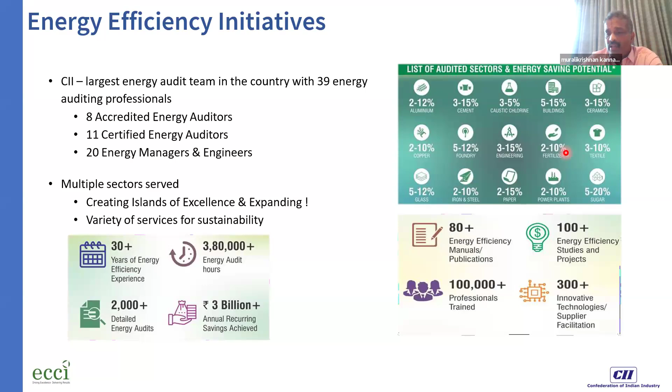Irrespective of whichever sector you are operating in, a building, a major industry, a cement industry, or a steel industry, people are continuously improving, because one of the fundamental reasons is that cost is increasing. We have not only worked in India, but across the globe in various countries, including Japan, Korea, and the Philippines. In the Philippines, we had the opportunity to visit and conduct audits in two of your sugar plants and two of your power plants. We have done work in Malaysia, Indonesia, Thailand, and African countries as well, and we are also trying to do an audit in the US.

Efficiency is important. The only two buzzwords happening across the manufacturing sector, the think tanks and the stakeholders: one is climate change, the other is startups, incubators, or innovations. Innovations and startups are the most popular words in the globe today. And second is climate change, which we all know the reasons for. We need to sustain the world. We need to give our grandchildren a better world. For that, we have to take action.

Internationally, all the stakeholders and think tanks agree that energy efficiency is the most competitive solution and still has close to 40% of the opportunity for reducing emissions in the most economical way. So that's why we need to focus on energy conservation and energy efficiency. It also supports energy security and business sustainability, and it can be the best tool to achieve ESG, where we have environment, society, and the governance is replaced by economics here. In all three circles, this is the central area where energy efficiency can definitely lead to sustainability.

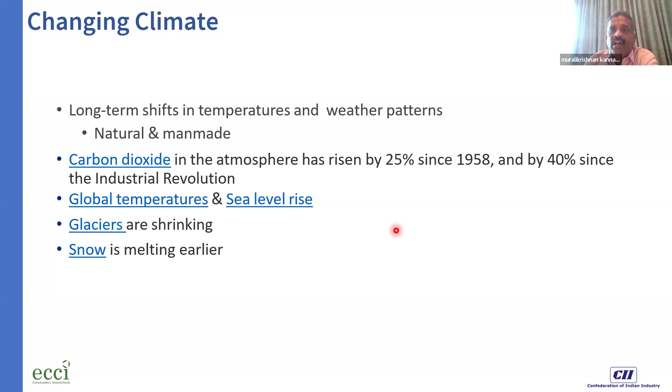Also would have announced it. India has announced the targets of becoming net zero by 2070, which is still far away, but still we need to do a lot of work on that. And then, as I said, the 1.5 degrees is going to come in 2027. We need much stronger, much deeper, and much bolder efforts to do that.

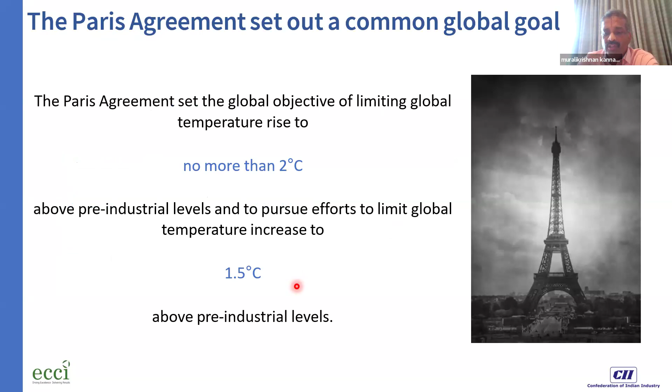Energy efficiency is one of the easiest, one of the most economical, and one of the most promising levers. So that's why we all need to take this on. And it's not only sustainability which is most important, but also to sustain the business, to become more competitive, to keep the margin, and to reduce the operating cost. We need to focus on energy efficiency.

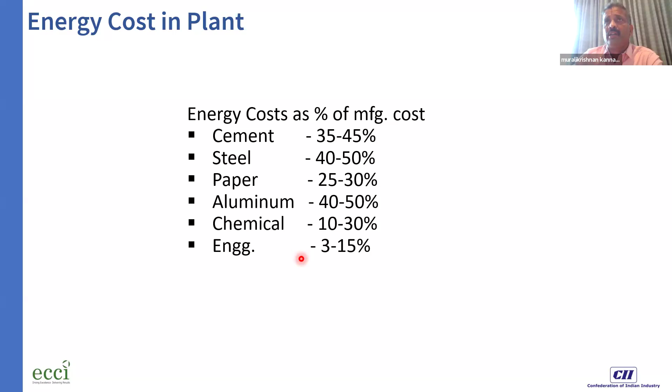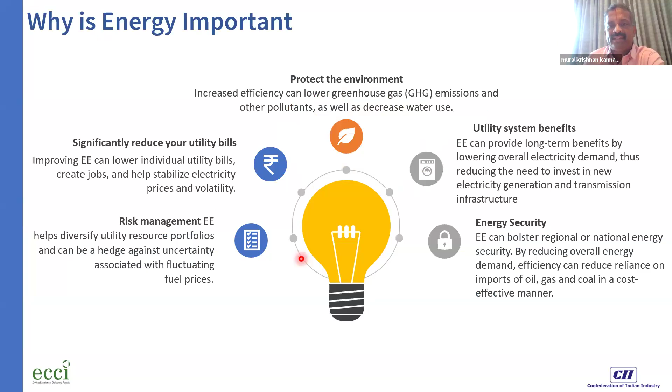And further, there will be carbon taxes, there will be other requirements, which will all increase our cost of manufacturing. So energy efficiency, by definition, is the process of getting more output with the same input, or reduced input for the same output. So that is what is needed. We have been discussing this, so I don't want to repeat it. So we need to focus on energy efficiency.

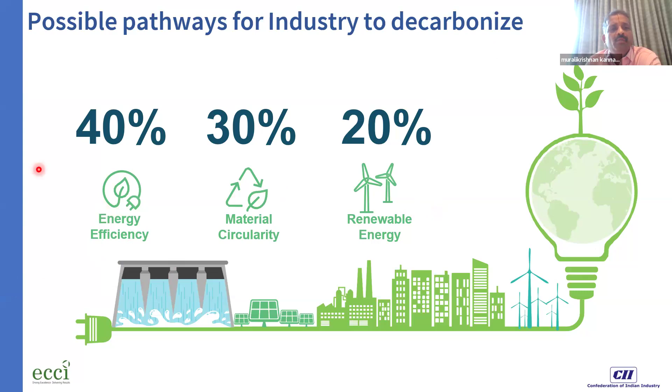And as I said, for decarbonizing, which is the most important goal of our generation, 40% can come from energy efficiency in the most economical way. 30% can come from material circularity, and 20% can come from renewable energy, because renewable energy is not very attractive, whereas energy efficiency is the most attractive tool to decarbonize our emissions.

And energy efficiency can be done by three methods. One is capacity utilization. Maybe some processes need 100% capacity utilization always. For some processes we can optimize what the optimum capacity is. And then, of course, fine-tuning. What we strongly believe, what we have understood and what we have experienced is that every equipment, every process has a margin. The margins are built by the plant people, by the designers, by the technology providers, and by the consultants. So why are margins kept?

Margins are kept to meet the immediate future requirement and varying climate changes. For example, all of us are experiencing extreme heat, extreme floods and extreme winters. So the same equipment, for example, an HVAC system in a building, has to adapt to all these conditions. Even in Europe or in colder regions, temperatures are now going up to 40 degrees. So the same equipment has to deliver at 40 degrees. It also has to deliver at 2 degrees or -5 degrees. So the equipment has to have a margin.

So the operating team, the working engineers in a manufacturing plant, their intention should be to fine-tune the equipment according to the current level of production, current level of demand, and current level of operational requirement. That's why fine-tuning is most important, and an energy audit will mainly focus on fine-tuning. Of course, on capacity utilization and then fine-tuning.

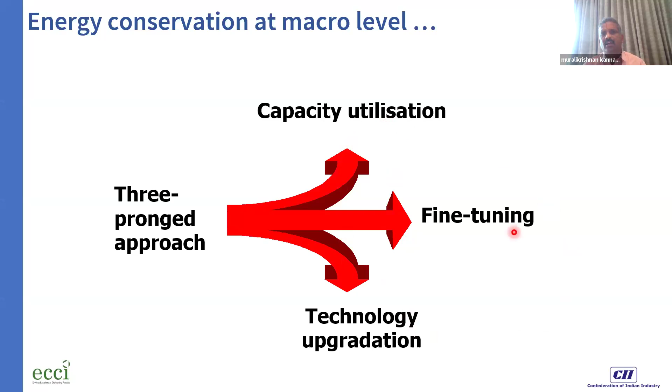In a study, when we focus on energy conservation or energy consumption, the audit team will definitely focus on all three, not only on fine-tuning, not only on capacity utilization, but also on technology upgradation. We have seen that all the excellent companies who are global best or international leaders in energy efficiency have three separate teams with a common objective, and they have tapped all the potential. So let us see a few case studies related to technology, capacity utilization, and fine-tuning.

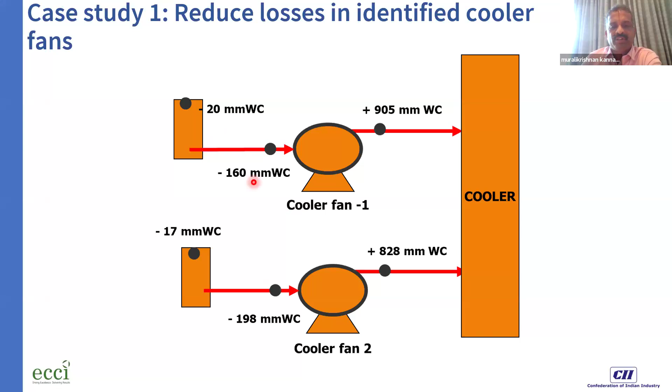The fan is consuming, say, for example, 185 kilowatt per hour. 19 kilowatt is additional or excess because of the high suction. So this is a clear case where 10% of the power is lost because of the improper designing of the suction. If the suction is properly designed, it should be minus 20. But because it is having a silencer which is not working fine, and the design of the inlet suction, the pressure is going to minus 160, which is equivalent to 10% of the power consumed by the fan.

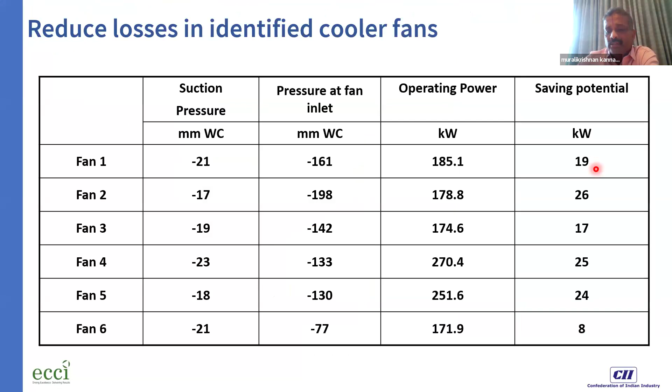So of course, you can quantify that for 8,000 hours in a year and then multiply by 10 years into your energy cost. This can be a significant amount. So what can we do? This is an opportunity where there is an improper design, and it is also a typical example of fine tuning. The radius of the inlet should be 0.25 times the effective diameter. That is the recommended value. So during the audit, we can check what is the pressure, what is the saving potential, and what is the problem in the design, so that can be eliminated.

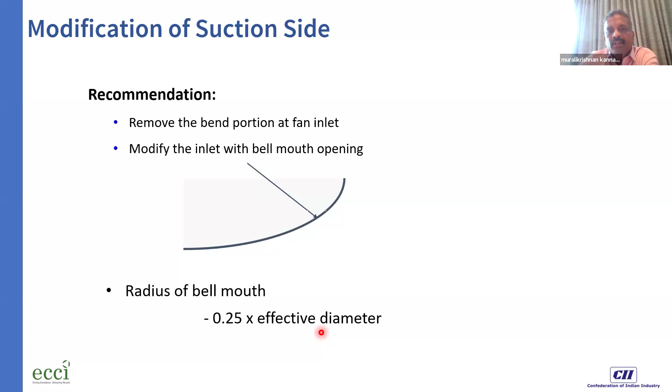Now, this is the case study of a plant where they have invested $6,000. Of course, these costs vary from country to country, because in some plants the manpower cost is very cheap, and the equipment cost is relative. Maybe in some markets the cost of equipment can be very low. But what is important here is the idea and also the implementation. This opportunity doesn't need a major modification. It is very simple technology, it can be easily identified and implemented in a very quick way. And most important, it has a very attractive payback period.

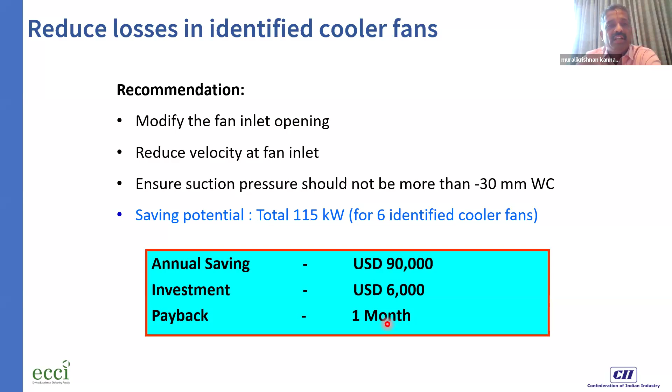The payback period is less than a month, maybe for Indian conditions. For international conditions, we have seen this in South Korea, Indonesia, Malaysia, etc., maybe the 1 month can become 5 months, but still it is very attractive. Similarly, if we talk about the latest technology, there are a lot of tools, artificial intelligence tools, IoT tools, which can help us in fine-tuning the process conditions.

For example, in any manufacturing process, whether it is cement, paper, steel, etc., there are fluctuations in the plant. These fluctuations occur in major important loops. For example, the PC outlet temperature versus coal feed rate, which is the most important process parameter. We have to maintain the calcination, which is important for the kiln to give a good quality clinker and to maintain the output. So the temperature is controlled with the coal feed rate. Of course, many things can vary. This is a practical PID loop of a plant, where you have the temperature versus coal feed rate. You can see the fluctuations.

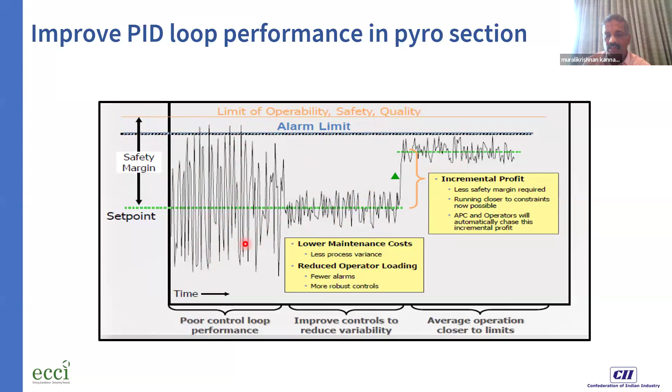If you have this kind of fluctuation in your process parameter, this is your alarm limit, or this is your set point. The operator will always try to keep a margin, and because the fluctuation is very high, he will not be able to put that in automatic mode. So he will be operating in manual mode, which will increase our specific energy consumption. There are a lot of latest tools available which can collect the data, connected to your PLC or captured from the MMI screen, and then the tools can tell you how much is the problem in the fine tuning.

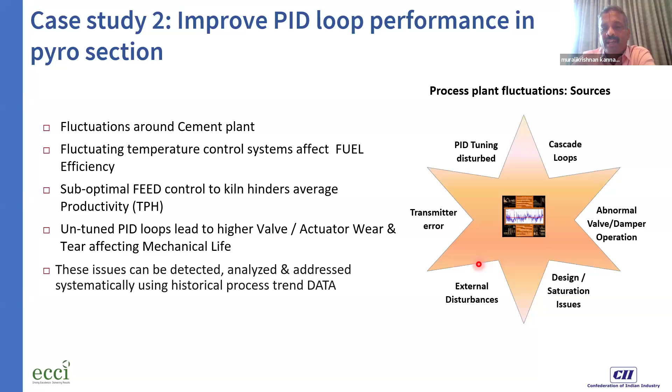This can also tell you: is the problem in the process itself? Is it the CV of the coal? Is it the temperature sensor? Is it the solid flow meter which is supplying the coal? Is it a mechanical problem? Is it a process problem? Is it a fine tuning problem? Your proportional, integral, derivative settings, set points, all these can be checked without disturbing the process, remotely, and a weekly progress report can be done. And at the end of the day, when you fine tune it, the loop can definitely become stable.

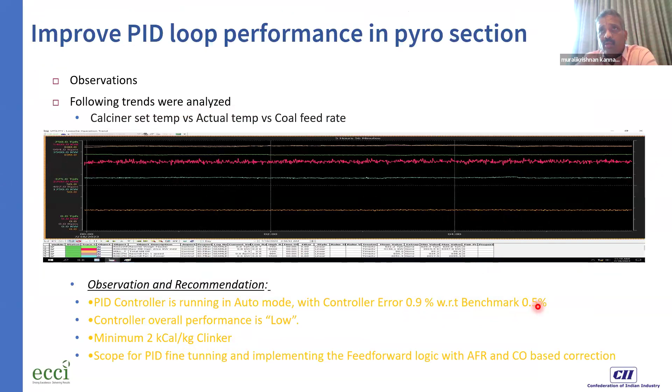This has been implemented in more than 50 cement plants in the country. They have achieved about 2 kilocalories per kg of clinker, which is significant. The PID standard deviation has come down from 0.9 to 0.5, which has resulted in better operation, better quality clinker, lowest energy consumption, and better savings. So these are some examples. In kiln firing, this was the earlier variation, and after fine tuning and taking action, the variation has come down.

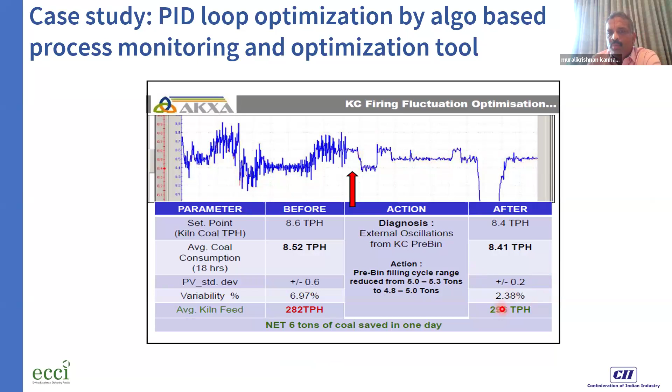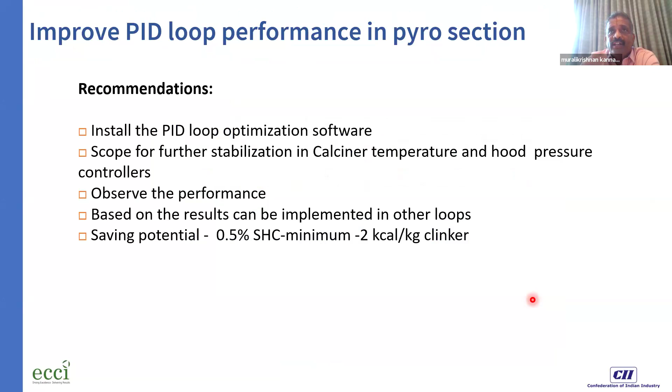So this has saved 0.5% of energy, which is significant on an annual basis. So this is what can be done with automated tools. This is another opportunity wherein we can see, just using a tool which is of the latest technology, without disturbing the process offline, we will be able to save some energy.

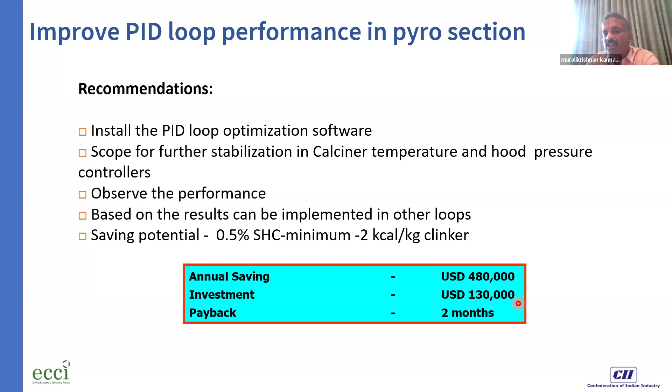So the savings is very attractive, 500,000 US dollars with just an investment of 130,000 US dollars, which again doesn't need any stoppages, doesn't need any disturbance to the process. This can help us in getting the payback period less than 2 months.

And then the other opportunity is, the entire cement industry is only gas and material. So the pressure drop plays a very important role. The fans consume about 25% of the total energy consumption. The fan energy consumption depends on the pressure. So during the study, we can see the pressure drop across the various ducts. So here in this case, the downcomer duct is having a high pressure drop.

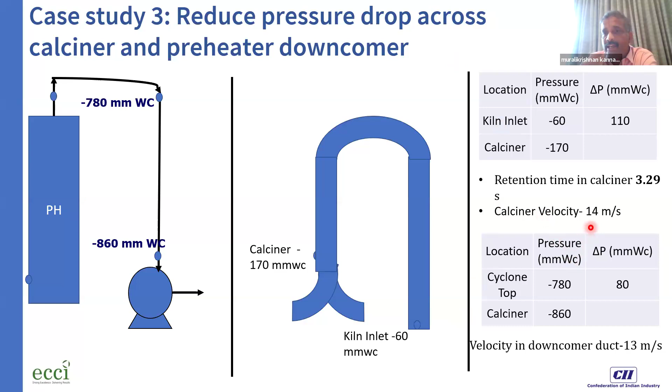We can measure the pressure drop across the cyclone, various process equipments, and then compare them. And then we can get into further details. Is it because of the velocity? Is it because of the false air? Is it because of the material accumulation? And then in this particular plant, though the velocity is only 13 meters per second, which is acceptable, the pressure drop across the calciner was more than 110 mm, and then 80 mm in the downcomer duct.

So that was significant. And what they did, they used CFD, computational fluid dynamics, to study the flow performance, and they have then taken some action. And then that action implementation has resulted in a power reduction of about 160 kilowatt per hour, which is very significant, which is equivalent to 123,000 US dollars in a year. Again, in this case also, the payback period is less than 6 months.

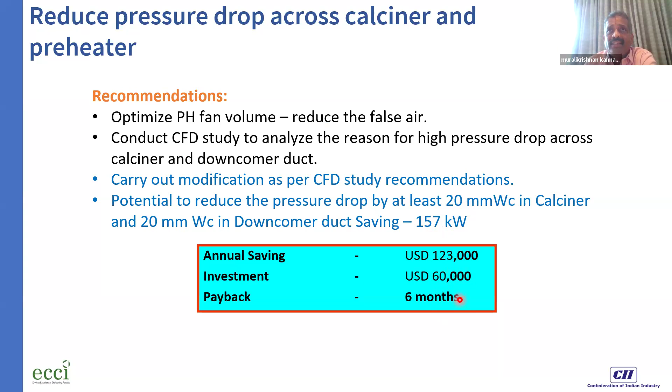So I'm saying it is not only an auxiliary area; an important process area, important process parameter can also be analyzed and optimized. And then the other thing is, we also get into deeper process conditions. For example, in any preheater, the purpose of the preheater is to preheat the material from the hot gas available in the kiln process. The heat transfer happens mainly in the riser ducts, whereas a cyclone is a gas solid separating equipment. The moment the gas and material enters the cyclone, the material gets separated from the gas stream.

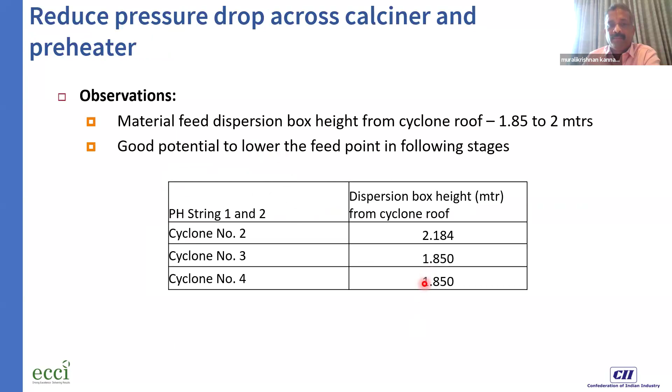So in this audit, what we have done, we have just seen what is the effectiveness of this heat transfer in the riser duct. How close are we utilizing the entire length of the riser duct? How close is the feeding point? So we have studied that, and we have recommended, and then the plant team has shifted that location to a lower location. Thereby, we are utilizing the entire heat transfer area. It increases the residence time. It improves the heat transfer. Thereby, the heat losses coming from the preheater have come down. This is a perfect process optimization example.

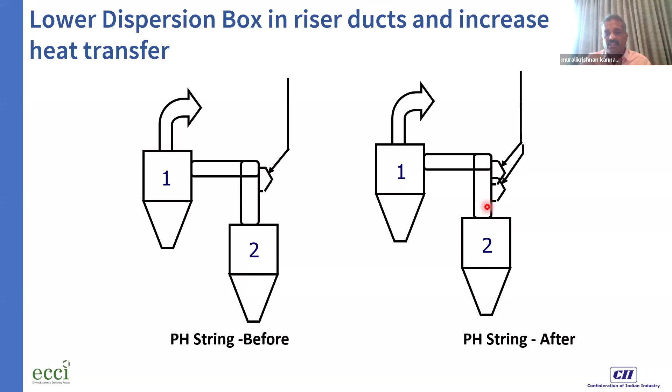So this has resulted in 130,000 US dollars with an investment of 75,000 US dollars with a payback period of 7 months. So not only we focus on electrical energy, we can also focus on thermal energy. We can also get into the minute details of each process area.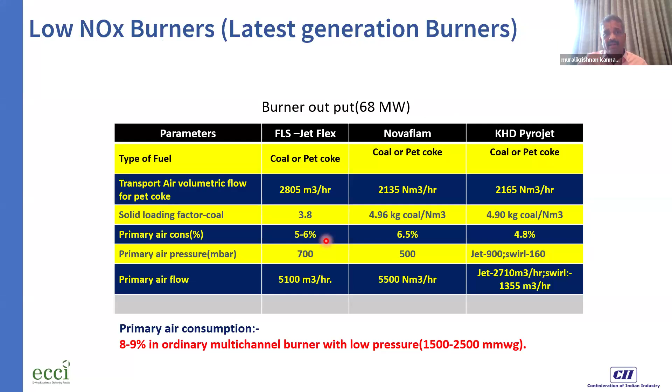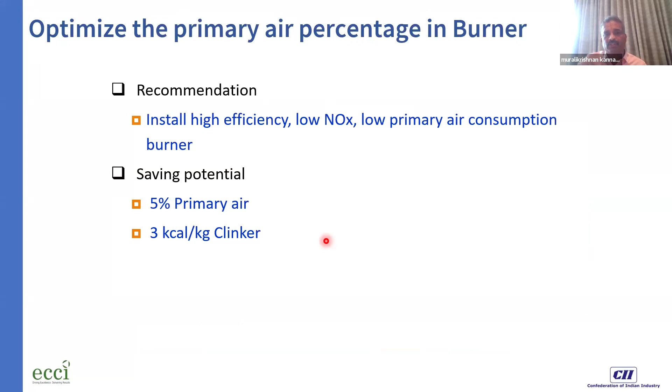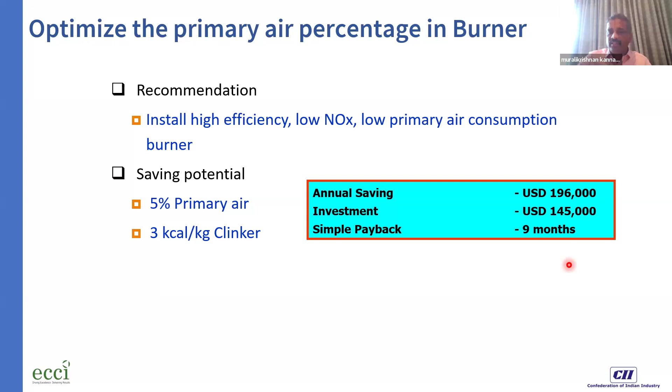And then we not only focus on thermal energy in pyro section. This is another example of a raw mill, wherein we study what is the importance of the gas flow. The gas flow in a vertical roller mill depends on 3 parameters. Either it could be because of a drying requirement, or it can be because of the separator requirement, or it can be because of the temperature, or for example, the loading of the separator.

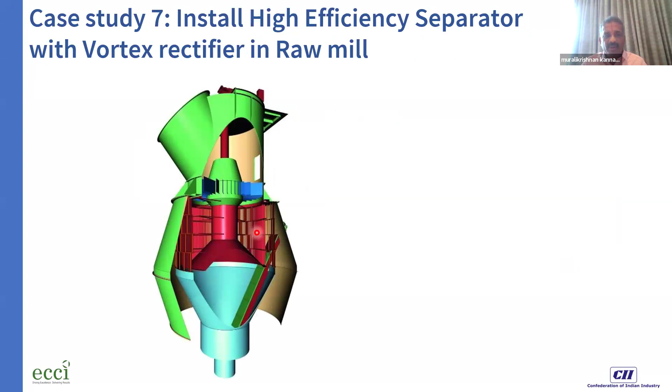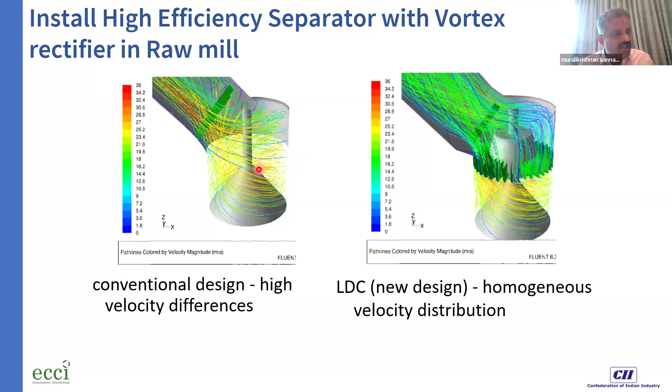So the latest technology is to study the gas stream. For example, in a conventional separator, the flow of the gas will not be in a uniform way. You will see red color, very high velocity zones. You can see a lot of turbulence. You can see a lot of recirculation. This will increase the pressure drop across the mill. So the recommendation was to go with the latest technology, vortex rectifier, so that this can be reduced.

So these are the opportunities. These are the various examples. With 3 decades of experience, and because of 200 cement plants in the country, we can also give you a lot of references. We can also arrange for you to visit the plant. We can also make you interact with the team who have implemented. So that will increase your confidence, and that will also give you feedback on the best possible way you can implement the technology.

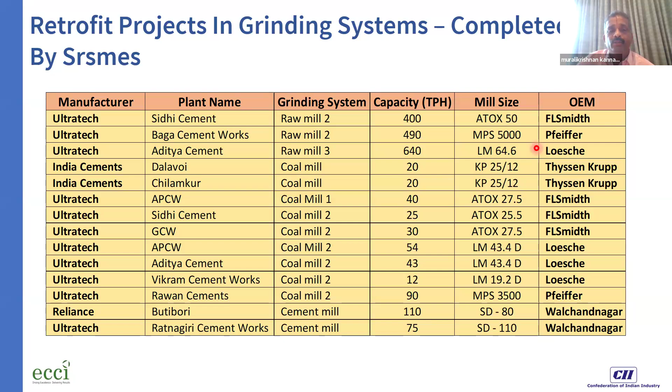So this is another small example wherein in the existing operating plant, we can reduce the cutoff clearance of a fan. Any process fan, again, as I said, 25% of the power is consumed by the fans. It is important to get the maximum efficiency of the fan. The efficiency of the fan depends on the cutoff clearance. If the cutoff clearance, which is the gap between the impeller and the casing, is on a higher side, there will be a lot of recirculation, and that will lead to more power consumption or loss of power.

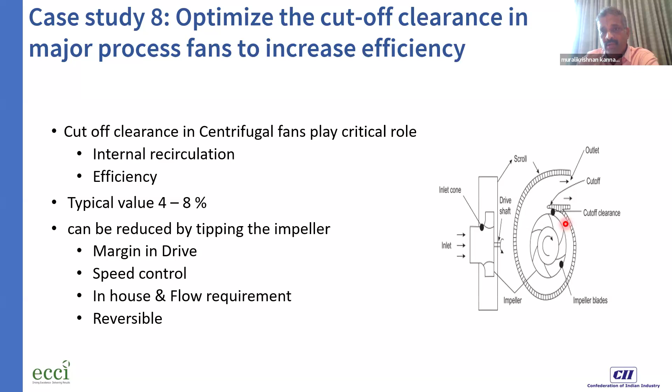So these are the studies in that particular plant. In a particular plant, the cutoff clearance was studied, and then the plant had an in-house capability, and they were able to reduce the gap, and they were able to achieve a good saving. So here again, the saving potential was 100 kilowatt per hour, even with the 2% efficiency improvement. This can be done by in-house team and doesn't need major investment. The savings is significant. The payback period is very attractive. So these are the few case studies which I wanted to share.

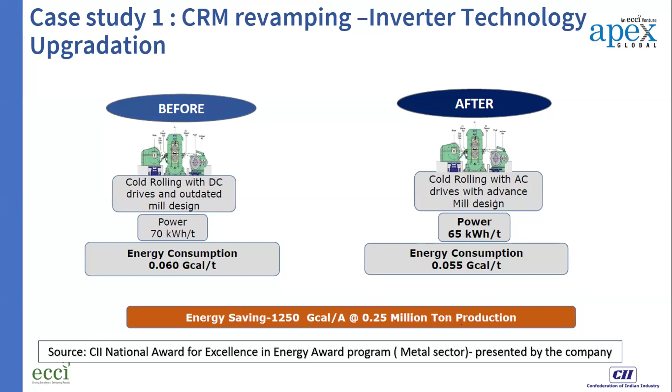So during these changes, they changed all their DC motors, which are very costly motors and maintenance is very difficult, to AC motors. And they have not only replaced the motors one-to-one, they have also installed energy efficient IE3, IE4 motors. They have also increased the speed from 450 to 1400 mpm because of the production demand, and it increased their productivity. And wherever possible, they have also installed level 2 automation. Because of that, they have saved a good amount of energy annually, around 1250 gigacal per annum for their plant. This is one of the projects.

I'm not aware of the steel plants in the Philippines. Maybe you have mostly secondary rolling mills. If you have secondary rolling mills still running on DC drives, then there also you can change to AC drives, and you can reduce a substantial amount of energy and also save the cost.

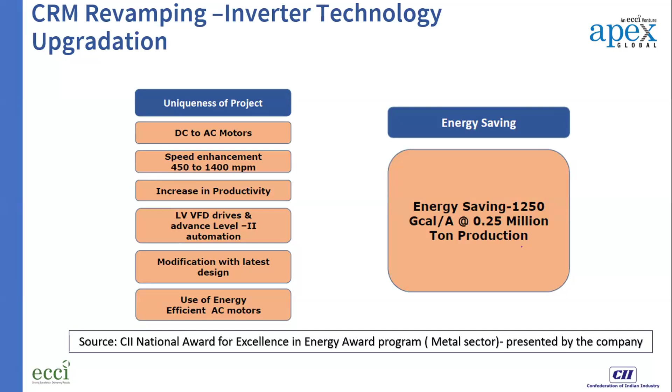Now, the second project: in our country, we have a large number of critical and non-critical transformers in our steel plants. Presently people are using mineral oil, which is a natural resource, and there's also a high maintenance cost involved with oil-based transformers. Now people are replacing their oil-based transformers with amorphous dry transformers, which are leakage and maintenance-free. So the cost is reducing, and at the same time we are saving mineral oil.

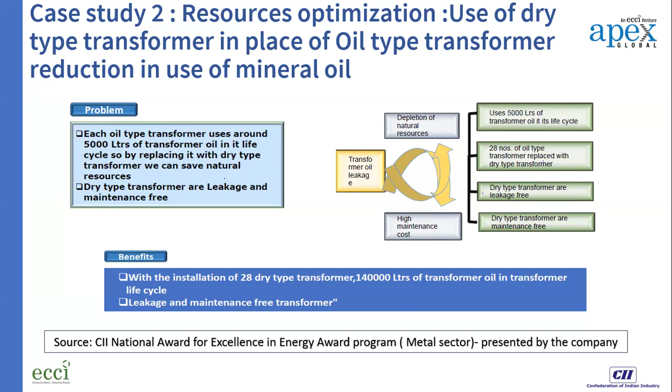So there's huge potential in different plants, whether you are from a steel plant, cement plant or fertilizer plant, anywhere people are still using them. I hope in your country you are also using oil-based transformers, so you can think about how to replace them with dry type transformers. This is another project implemented by another company, and all this information is available on the CII GBC website. If you need more information, you can contact us or directly contact the company and we can share with you.

Then the third project is blast furnace gas TRT installation, related to integrated steel plants. The integrated steel plant will have the blast furnace, where iron ore is reduced to liquid iron. When it is producing liquid iron, it also generates a substantial amount of blast furnace gas at high pressure. That pressure can be utilized with a turbine, and through an alternator you can generate power. In this plant, liquid iron production is around 8,000 tons per day, and top pressure is around 2.5 kg.

It is very high. So they installed a top pressure recovery turbine. They reduced the pressure from 2.5 to 0.5 bar, and because of that, they generated 14 megawatts of power. It's a huge quantity of power, just by utilizing that pressure. So they are now not taking that 14 or 15 megawatts of power from the grid. It reduces the overall energy consumption of the plant, reduces the overall cost, and also reduces CO2 emissions, because you are now using all the pressure.

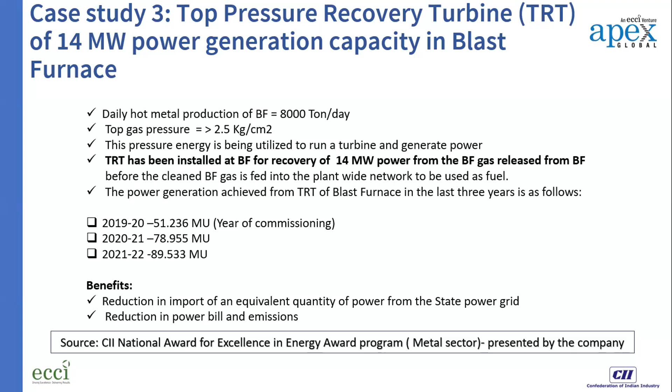Using the pressure, you are generating the electricity. So this is also another good project. Most of the steel plants in India are following and implementing this project, or if a new plant is coming up, they are also going for this TRT or top pressure recovery turbine. This is one of the projects implemented and presented during our energy award program that happened in Hyderabad.

Now, the next case study is specific power consumption in the induction furnace. If you have a secondary rolling mill, definitely you have a steel melting shop. And in the steel melting shop, people mostly use the induction furnace for melting scrap or DRI. Generally they don't know what is the actual power required for melting this scrap. That is why one company has developed a new power controller system. They have developed a load cell.

This load cell senses the actual weight of the scrap, and based on that, it gives the actual amount of power to be sent for melting this scrap. By properly managing this, they are optimizing their power consumption and saving electricity. As they reduce their electricity consumption, their specific power consumption is also reducing. Also, as they reduce the electricity taken from the grid, their greenhouse gas emission is also reducing.

This kind of induction project is applicable across any sector wherever people are using induction furnaces. Particularly in India, there are 1200 plus secondary rolling mills with their own steel melting shops, with induction furnaces of 5 ton, 10 ton, 12 ton. This project has huge potential; if companies implement this system, they will save electricity drastically. All these case studies we are talking about are presented, implemented case studies, not new ideas that may come up in future. They have substantially reduced the power consumption.

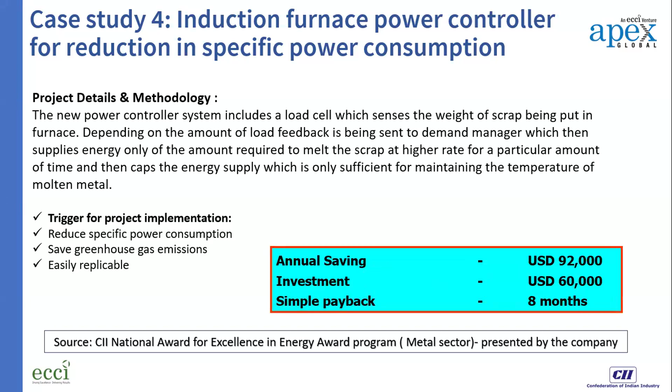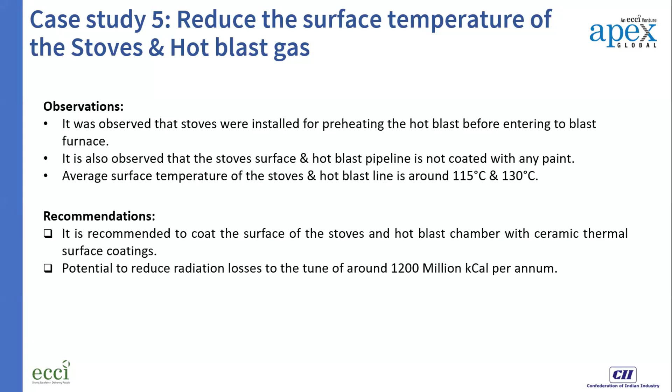Then another project is in the blast furnace area, with the hot stoves. Generally there is no coating on the stove surface and hot blast main. The average surface temperature of the hot blast and stoves is around 115 or 130 degrees, so there's a huge amount of energy wastage. One company applied a special ceramic thermal coating, which brings the temperature down to 50 to 60 degrees centigrade, thereby saving fuel in the blast furnace. They have reduced fuel heat by around 1200 million kcal per annum.

This is another innovative technology. Companies are manufacturing this coating, and it can be used in any industry where there is heat radiation loss, particularly the steel industry, forging industry and automotive industry. The material can withstand temperatures from minus 18 degrees to 1800 plus degrees. These are a few of the case studies we wanted to share that steel plants have implemented, but there are several other case studies also.

For example, in steel plants people are using medium voltage drives for their fans, pumps and blowers. That has become a very common project for the industry to implement. People are also installing various kinds of industrial automation and Industry 4.0, and going ahead with ISO 50001 energy management certification, properly managing their energy consumption.

Because in India energy cost is very high, particularly in the steel industry. Whether it is a DRI plant or an integrated steel plant, energy cost is almost 40 to 50%, including all types of fuels, whether coal, coke, gas, or electricity. Though our consumption is a little on the higher side, 6 gigacal, some good plants are really there, like Tata Steel, JSW Steel, and SAIL units.

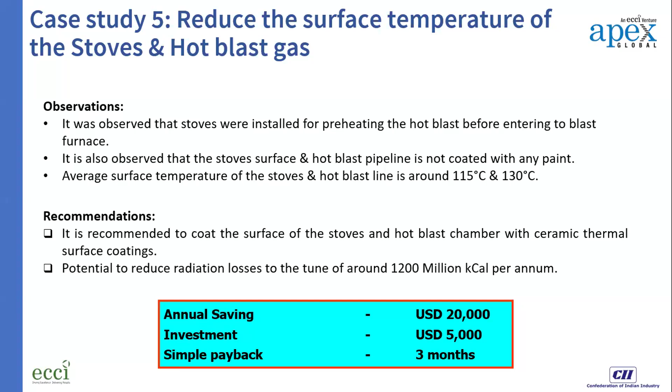They are really an efficient plant. Their plants are very green plants. So now we'll talk about some of the latest technology related to energy efficiency and resource conservation.

So in India, a number of startups are coming up. Startups are working in the clean tech domain. They are working on energy efficiency, water management, waste management, renewable energy generation, green products, IoT solutions. So they are coming up with the latest innovative technology, which is now applicable for any kind of industry, whether steel, cement, paper, power, any kind of industry. These types of technologies are available.

So we want to share a few of the technologies, and maybe we can discuss in detail when we come to Manila next month. So we can talk more on that. We can share more info on these technologies.

Hi, Sir Sougata. Yeah, hi, sir. I think your camera is off, or does it have any problems? Yeah. Camera? Yeah, it's good now. All right. Okay, thank you, sir. Sorry, I missed it.

So next is our new smart sensor for the motor. Generally, we install the motors, we take only the voltage or current, and we take the power consumption. But new kinds of sensors are there, smart condition monitoring. So what is the temperature, what is the vibration level, what is the kilowatt it is taking, all this information you can capture at one place.

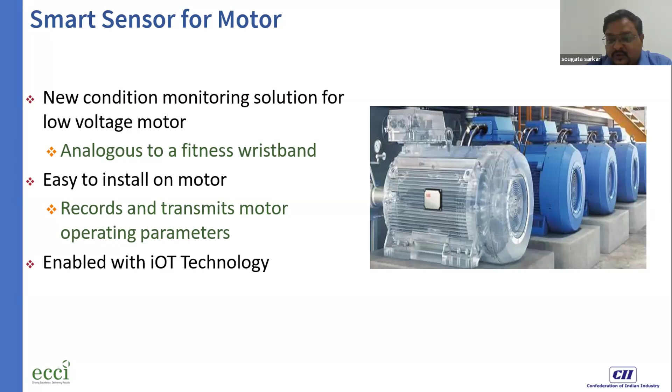And that is not only in your MCC room or PCC room, you can see it at your office also. You can see which of the motors are running, what is their condition, what is the loading, and based on that you can decide whether that motor is consuming more power or any maintenance is required in that particular motor. So these kinds of sensors are available in the market, and this also increases your efficiency by 5%.

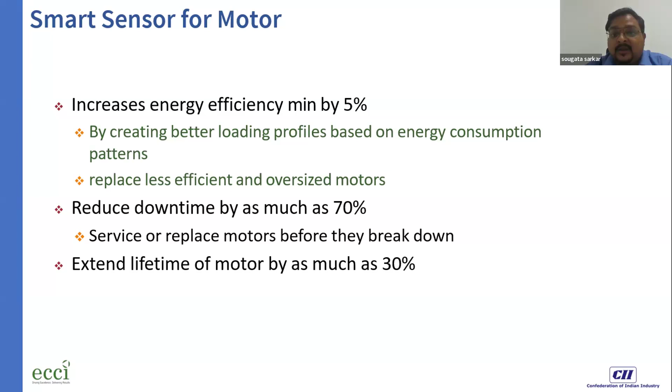Also, as you are predicting the status of a particular motor, you can reduce breakdowns. You can replace the motor before it breaks down. And because of that, the lifetime of the motor gets extended by as much as 20 to 30%. So this is another innovative technology now being implemented by Indian industry, particularly the engineering industry.

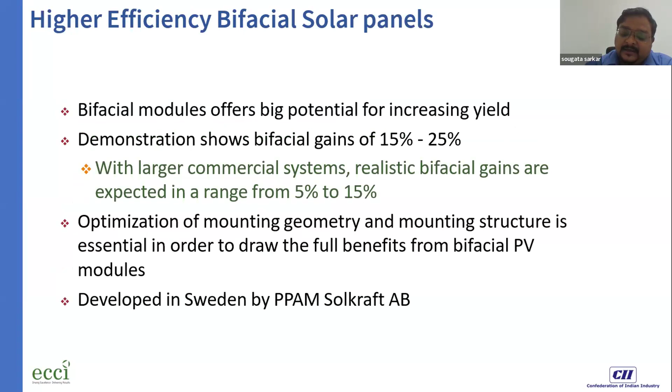Now, second is the high efficiency bifacial solar panel. Generally, you know that conventional solar PV generates power from one side, but the bifacial solar panel is a new technology, so it can generate power from the backside of the panel also. By this we can get another 10 to 15% more power compared to conventional solar PV panels. Conventional solar panels may be 18 to 20% efficient, but these panels, because they generate power from the backside simultaneously, are 3 to 5% more efficient.

This is a Swedish technology. They initially developed this technology, and we at CII GBC, Hyderabad office, also installed this 135 kilowatt panel on our rooftop. That is why we are now getting more power, and we have converted our existing green building into a net zero building.

So now in India, we have seen all the steel plants, particularly big steel plants, going for renewable energy. Wherever land is possible, they are going for big 3 megawatt, 5 megawatt solar power plants. Where rooftop is available, they are also putting solar panels. At least they are trying to save some amount of energy in their process.

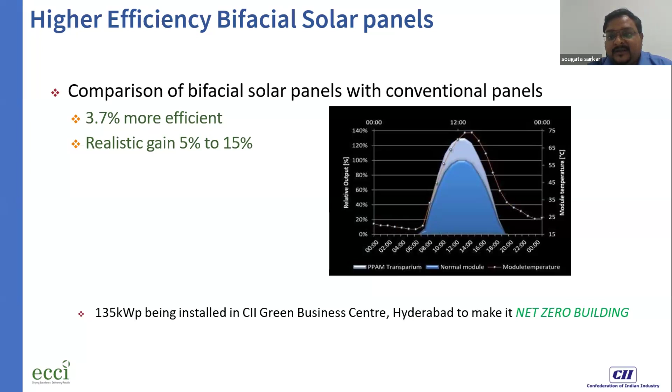Third is the frictionless coating system. That is another technology for whatever pumping system we have. In the steel industry, for the cooling system, we need a large number of pumps. If the pumps are very old, because of that old age, friction issues are there. So now special types of coating systems are available. If you coat the inside of those pumps or their impellers, it will increase the efficiency. At least 2 to 3% improvement in pump efficiency is reported.

Because when you buy a pump, you may replace it only after 20 or 30 years. But before that, if there is an issue with the pump, you can increase the efficiency by applying this coating system. Potential areas are particularly the cement sector and steel sector, where you use a large number of pumps, like power plant pumping systems, the WHRB section, then fans and river water pipelines.

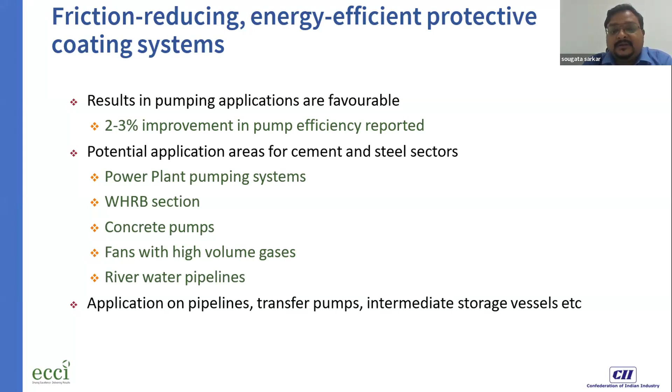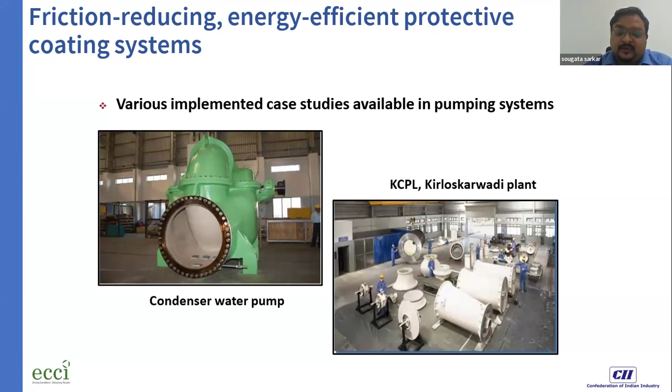Then another new technology is the waste heat recovery from the compressor. Compressor is the major energy intensive equipment in the industry, whether it is steel, cement, paper. It is consuming very high power. Okay, whether you are giving 100% power, actual useful energy is only 10 to 15%. So most of the energy, in the form of heat, is thrown to atmosphere.

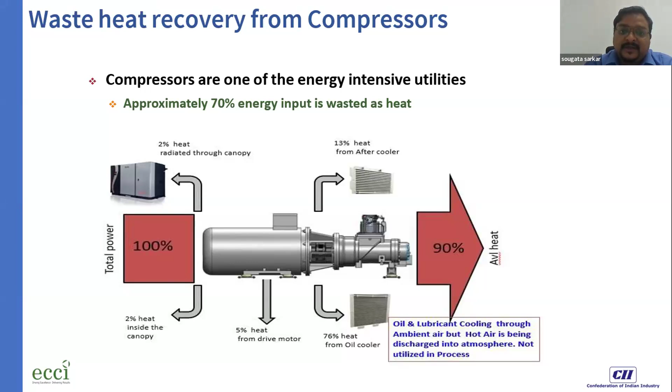If you put a heat exchanger, you can capture that heat and use it to preheat your hot water. Maybe that hot water can be used for your boiler system. Maybe you can use it for space heating. Maybe you can use it for your chiller system. So now this is a new type of technology, particularly in many engineering industries and many steel industries. They are going with this heat recovery from the compressor.

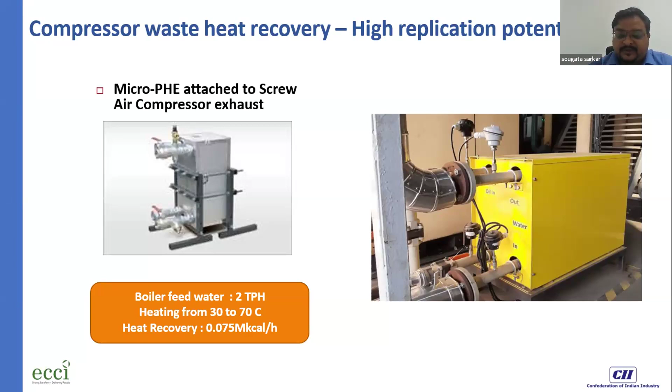Okay, if you have the oil lubricated compressor, putting on a heat recovery system, therefore they are getting that hot water, and that hot water they are using in the boiler feed water, or for space heating, or for hot water generation in the canteen. So that is not a highly capital intensive project, but it is a medium investment grade project, and you can easily implement it in your plant. And there are several other companies also developing this type of product.

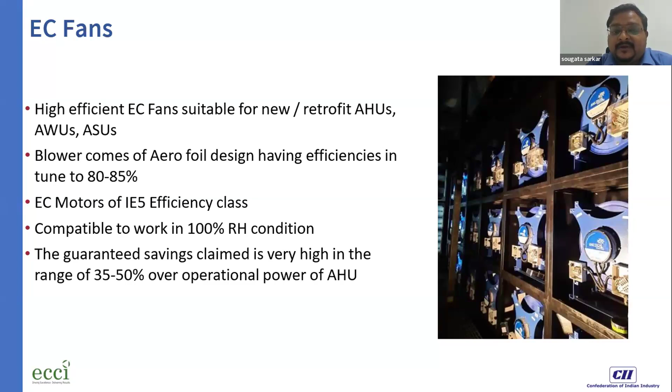Then another innovative product is the EC fans. Generally, you have seen our air conditioning unit, that air handling unit. Those are normal conventional blowers only, but now EC fans are available. This uses the brushless DC motor, and they are using the IE5 grade motor. And that is why energy efficiency is very high, around 80% efficiency is achievable by installing this type of energy efficient BLDC motor.

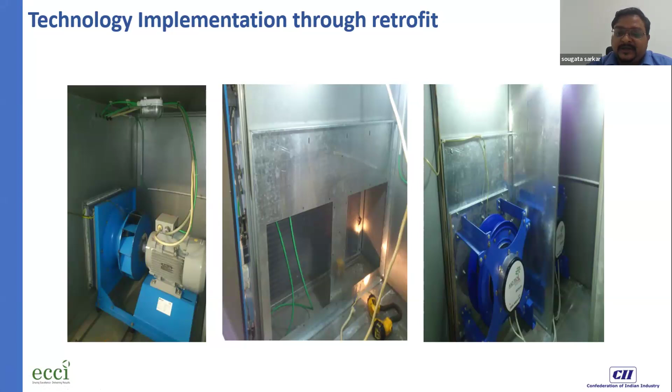This is a conventional blower. You have a motor, you have an impeller, a blower, then you have power connection system, everything. But if you see the right side, it is a very compact system of BLDC or EC fan. So you can install a new EC fan in your system based on the requirement. Also, it can be used as a retrofit project. In the conventional system, you have that AHU box. You can remove existing motors and put your newly designed EC motor. So these are very efficient, around 80% efficiency for EC fan.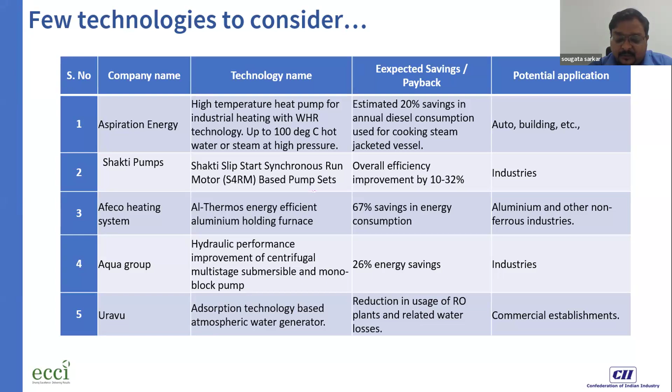Then some companies are there with atmospheric water generators. They can generate water from the atmosphere. It is applicable for the commercial and domestic building sector. Then energy efficient synchronous motors are also there. That is around 50% energy saving over conventional fans if you are using ceiling fans in your plant.

Then Nebeskie is there. Their IIoT platform is there for MSMEs. They can capture all types of energy: liquid, gas, electricity, then compressed air monitoring system, water monitoring system, everything you can see in a dashboard. So that type of system is also available, with which you can save around 5% in energy.

Then also regenerative burners are there for ladle preheaters in the steel industry. In the steel melting shop, there are also opportunities. If you use the regenerative burner, around 18 to 20 percent you can save, and that is applicable mostly in the steel forging and foundry industry. And also biodegradable plastics are there, that can be used as a replacement for plastic. And now people are talking about green hydrogen, utilizing it in the blast furnace in the steel plant.

So those projects currently are in the R&D stage, but very soon, in another 5 to 7 years' time, people will start using green hydrogen in our process, because the government of India has set a target of using around 5 lakh megawatts of solar power energy by 2030.

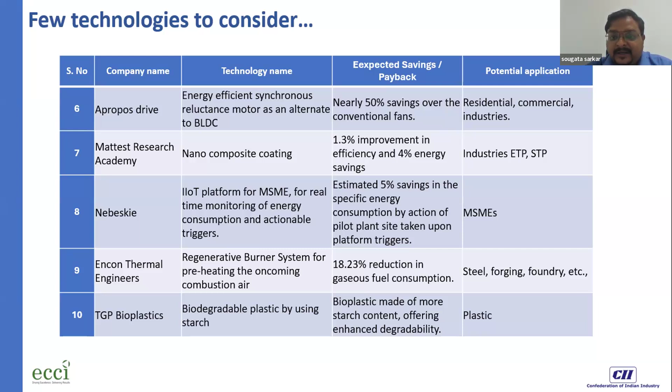So these are some of the technologies like EV systems, green hydrogen, and energy storage systems. These are the very upcoming technologies in India. So very soon they will be implemented in different plants and will save energy industrially.

So what we want to sum up here: there are various opportunities, not only from the steel sector or cement sector. There are opportunities from different sectors. Every sector is developing, and they are developing new technologies. Big plants are also accepting and adopting those new innovative technologies. And energy managers and energy auditors are also playing a vital role for the performance, to reduce the energy consumption of the plant.